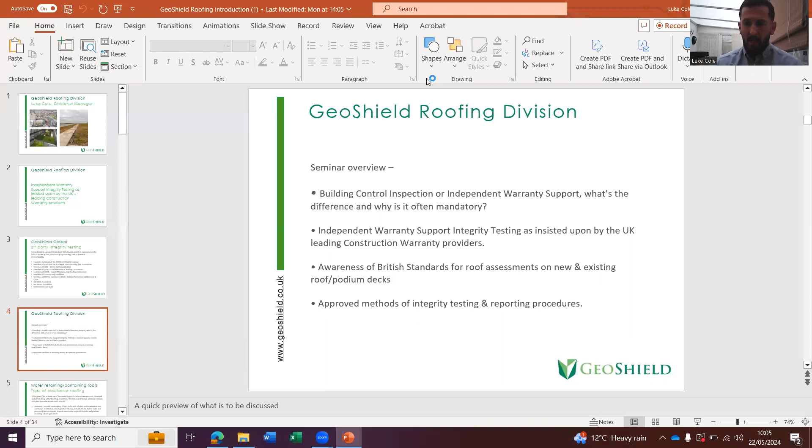So just to give you an idea of what the seminar is going to be about. So obviously we know about building control inspection. So we're going to talk about what they do, but really the difference between that and what we do as independent warranty support. So although there are some similarities, there's also some difference as well. So we'll touch on what's the difference between the two. And then we'll go on to look at some of the awareness of British standards and the requirements of companies like we just mentioned, NHBC, LABC, Premier, the big warranty providers. And then we'll touch on some of the approved methods of integrity testing and what's involved in the reporting procedures as well.

So the types of green roofs that we tend to come across, there's three types there. You've got your intensive, which you tend to see more perhaps on top of a car park, so more like a park type area, quite a deep vegetation, bigger plants, etc. Then you've got your semi-intensive, so that's something you might see like a garden roof, a much thinner type ground into that, only about 15 to 30 centimetres substrate base. And then you've finally got your extensive, again, a much thinner type base, but this one is self-seeding. So it's just the sedum that's put down and then allowed to self-vegetate. So quite a natural looking finish to that one.

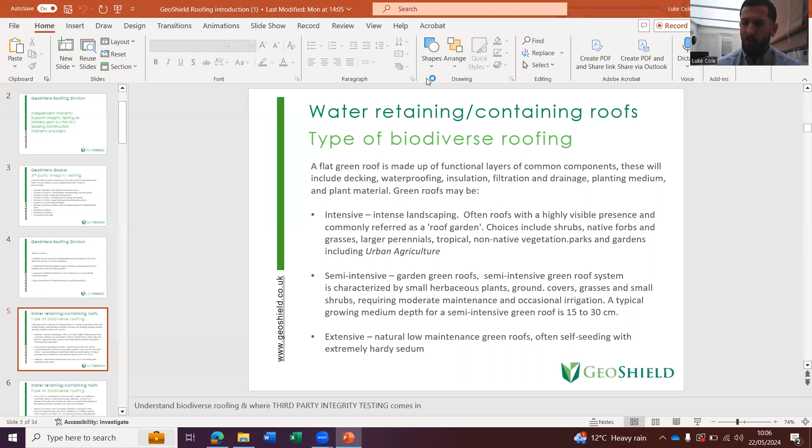Your different types of roof that we tend to get called out to test. You've got your blue roof. Some of you may not have heard of blue roofs, I don't know, but a blue roof is a bit like an attenuation tank. So it's designed to control the amount of water that goes into your storm water drains. So it acts as a tank system on the roof, and then valves are installed to let that water flow off

at a controlled rate. Your brown roof systems are more commonly referred to as biodiverse roofs. This is the self-vegetating substrates, as we said, these natural ones which are allowed to vegetate in their own way. Your blue-green, that's as it sounds. So you've got your water attenuation, and then your green roof finish, and then biosolar green roof, again, as it sounds. The idea of a green roof system, but with biosolar panels on there as well.

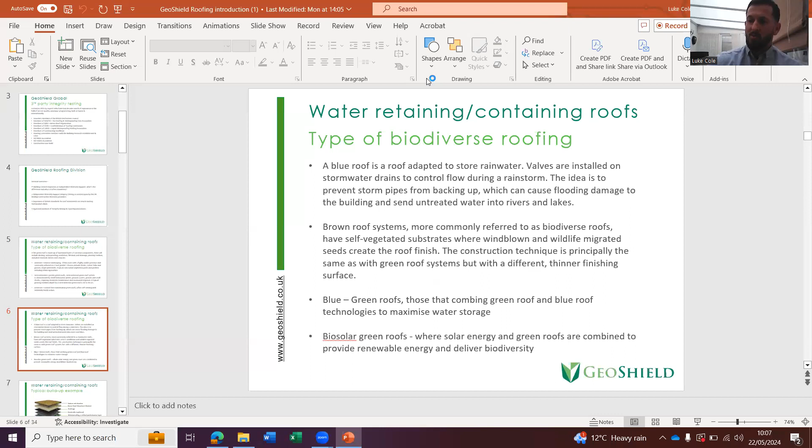So just thinking about the typical kind of build-ups of what you'd expect to see. This is quite an important slide really to pick up on, because as you can see, you've got your base roof structure substrate at the bottom there, and then your waterproofing layer sitting on top of that. Now, why I say it's important, because above that, as you can see, there's actually 4 layers of system that's installed on top of the waterproofing layer.

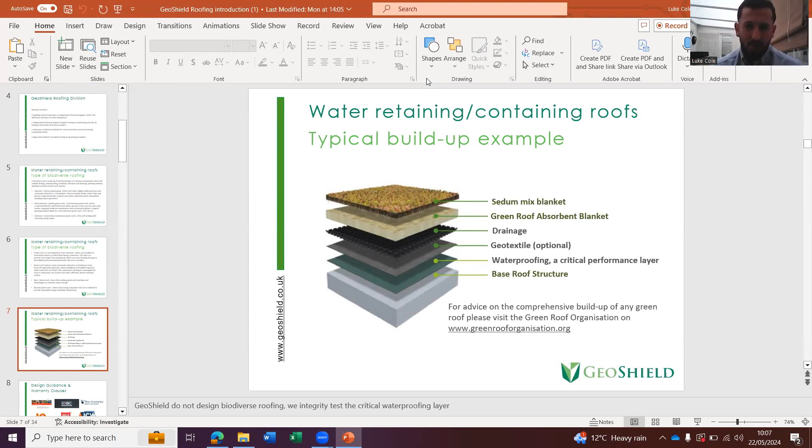And later on in one of the slides, we're going to see the importance of testing while you're at waterproofing stage. As I'm sure you're aware, once those 4 layers go on top of the waterproofing layer, to then try and find a leak is going to be very difficult. So it's the importance of testing at the right stage of your development.

So moving on to building control then, we won't spend ages on this because I know most of you are going to know what building control do. Building control are designed in a way to eliminate or to learn from past building failures. They have certain minimum standards that they need to achieve, and a building control surveyor is interested in making sure that these minimum standards are complied with. But the difference we're going to see between the two is that a building surveyor concentrates really on what they see on the day of their inspection, or perhaps at the time a completion certificate is issued.

So moving on to warranty support, so flipping the coin to the other side, very similar in a way that, again, these things all work on learning from building mistakes, or as it says here, past insurance claims. So similar in that aspect, but what's the difference? Well, we have to take into consideration not just what we see during the visit, but we have to look at the installation and the membrane across a much longer period of time. So as it mentions here, a structure within a 15-year period, for example.

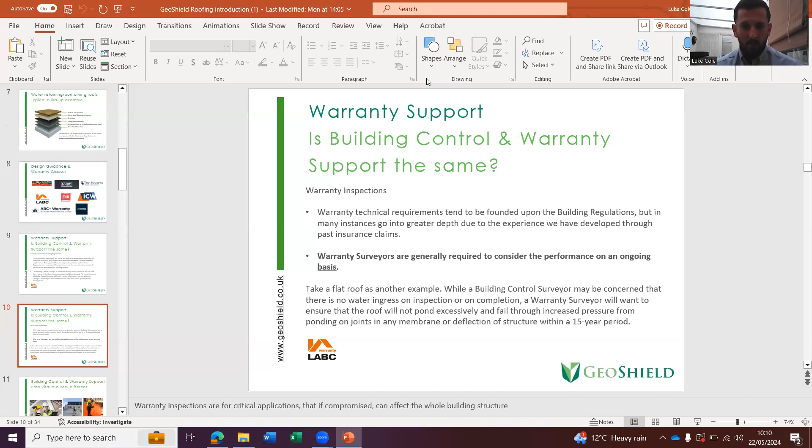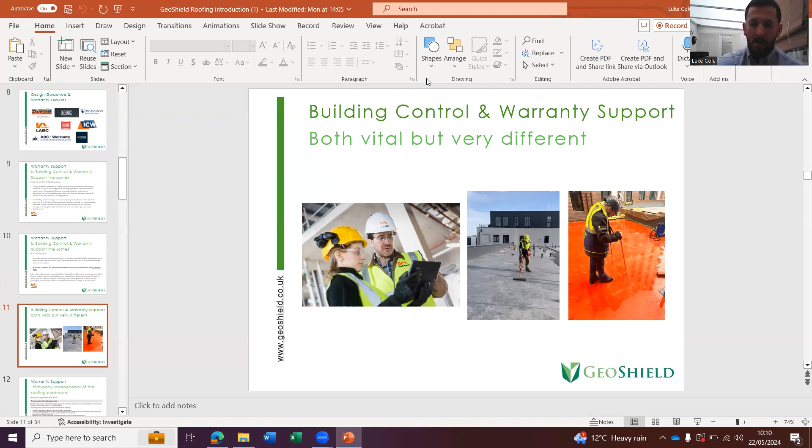So we're not looking at just what we see during our visit, but also we've got to look at the way that the system has been installed, maybe incorrect falls on the roof. They may not cause problems or issues straight away, but we have to take into consideration, will these cause issues within a few years of the building being in place. So building control and warranty support, as we know, they're both vital. There are similarities, but yet they are also very different at the same time.

So this is where people are perhaps coming unstuck, not having the knowledge of what is required. You know, years ago when I was roofing, we used to just install our product, rely on the warranty that was given by the product manufacturer, and that was good enough. But now these things are being put in place because of the issues and the claims that are coming in, that they want this third party, so this non-biased testing. So that's on flat roofs.

Similar slide, LABC again, this is the green roofs, exactly the same content. Again, required testing, suitably qualified, experienced third party who is independent from the roofing contractor. So it touches on some of the things that should be provided. So the efficacy of the method proposed in the circumstances of the project, a detailed testing regime that includes integrity testing of detailing, specifically where the warranty surveyor has raised any issues, experience and training of operator, and membership of an appropriate trade association that sets a code of conduct for the service.

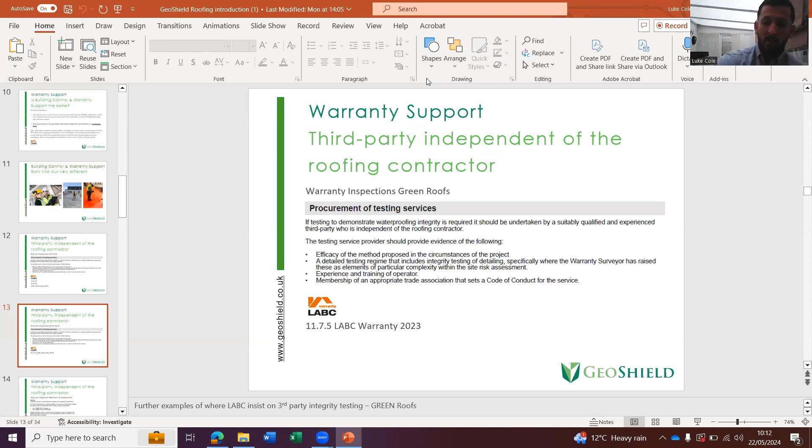So, you know, we're not preaching here, we're just literally making you aware of what is in LABC's, NHBC. We're going to go on to see some of the others, what is in their guidelines, because we're finding that a lot of people perhaps just don't realise that this is in there.

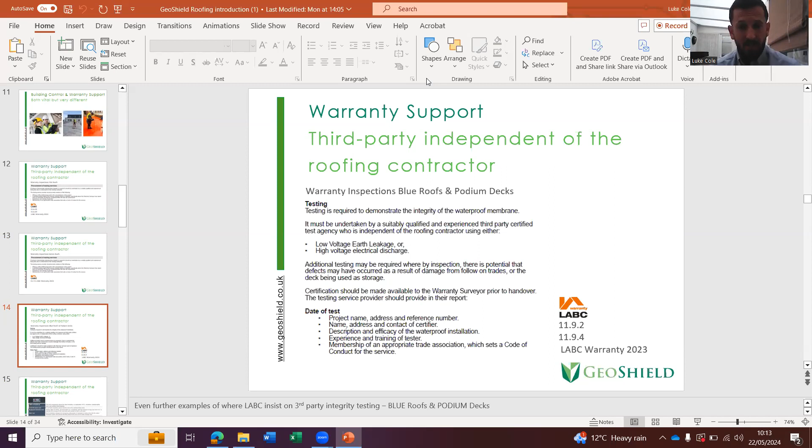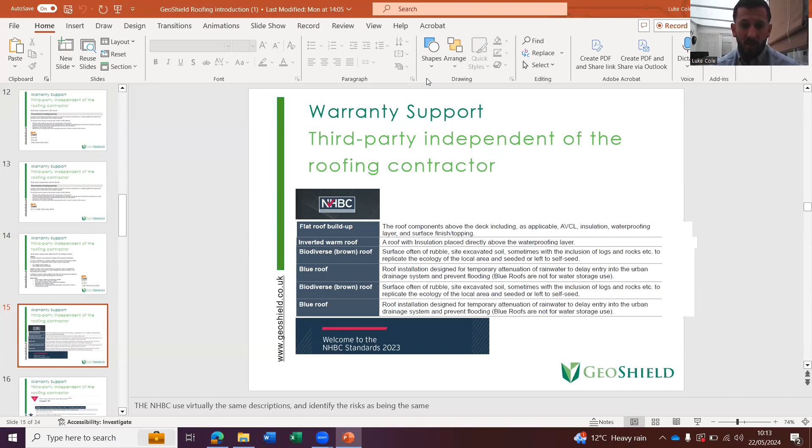So moving on to NHBC, again, another massive insurance provider. They go on to state what types of roof need this testing. So you've got your standard flat roof build-up, inverted warm roof, a biodiverse brown roof, your blue roof, your biodiverse brown roof, sort of similar, and then blue again. So that touches on the types of roof. And then we go on to see what they state in their guidelines.

It says the system should be installed in accordance with the design and the waterproofing layer manufacturer's recommendations and integrity testing prior to covering. And so just going back to that slide we looked at earlier with the green roof build-up, this is why it's important to do it prior to covering. Once your green roof is installed, you've got 4 layers sitting on top of your waterproofing, and any type of testing of your waterproofing layer is nigh on impossible at that stage without removing your layers and getting back to your waterproofing layer, which is going to be costly, time consuming, it's very difficult to do.

So it's a bit like the saying, when do you want to know there's a hole in your boat? Is it when you're sitting on the shore or when you're in the middle of the ocean? We're trying to get this testing done at the right time. So when the roofs are either finished or during the installation process.

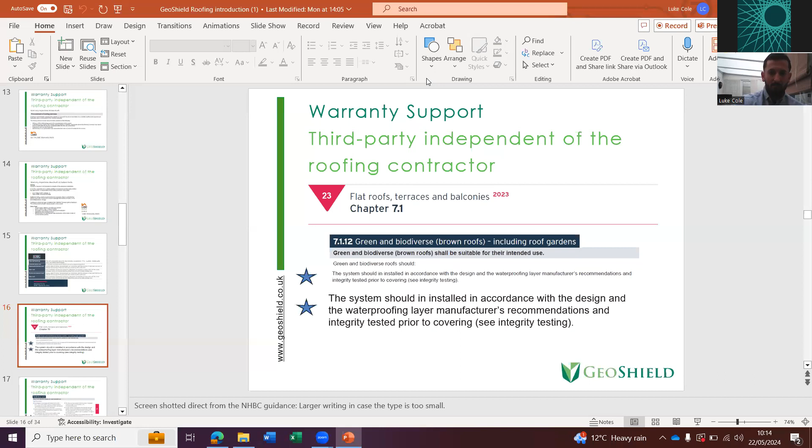So moving on, still on NHBC, it says include waterproofing layers suitable for use in the blue roof system and subject to independent third-party assessment. So for every type of roof mentioned here, so we're now looking at blue roofs, again, third-party testing is what they recommend. And again, they have the right to come out and ask to see the report at any stage.

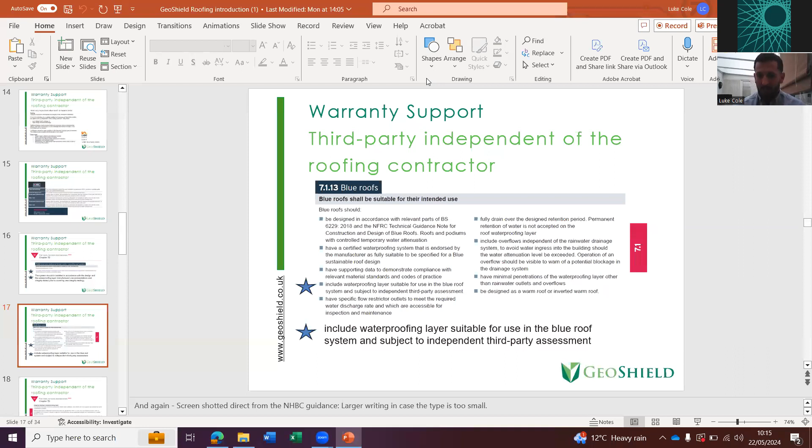So moving on to our third-party independent section, integrity testing of waterproofing layer. Just to touch on what it says, the waterproofing layer should be inspected for defects after installation. But notice it says any defects are to be repaired and retested and left in a satisfactory condition. So this again is all dependent on when this process takes place.

So if it was a big project, maybe a 20,000 square meter project, it doesn't have to be that size, but if you're following a program, you need it to be tested before it's covered. It may be that there'll be several visits booked in. So we test an area, and then once it's signed off, that area can then be covered.

But notice if any defects are found, these need to be repaired, and then the repaired areas are then retested to make sure they're in a satisfactory condition. So again, this would be included in the report, photographic evidence of the test taking place.

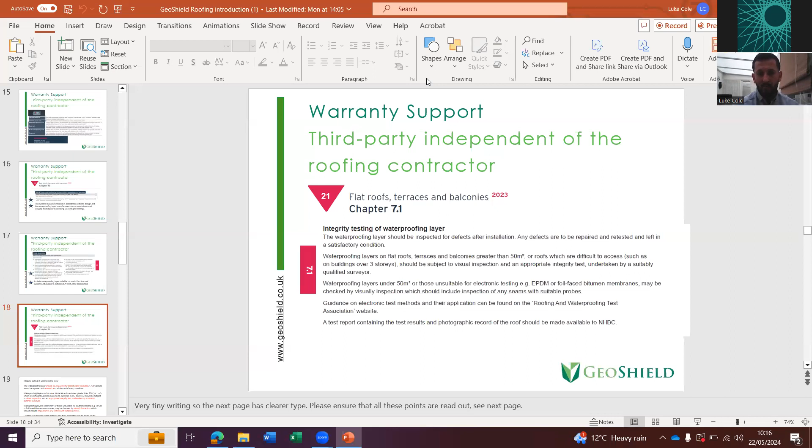So integrity testing: the waterproofing layer should be inspected for defects after installation. Any defects are to be repaired and retested to NHBC standards. Waterproofing layers on flat roofs, terraces and balconies greater than 50 metres squared, or roofs which are difficult to access, such as on buildings over 3 storeys, should be subject to a visual inspection and an appropriate integrity test undertaken by a suitably qualified surveyor.

So there are some membranes out there, as we mentioned in that paragraph, EPDM. This is a membrane which has a carbon fleck through the product, which makes it impossible to electronically test, because obviously you're running electronic current and you'll get false readings from the carbon in the product. So this is when either a visual inspection, a pick and probe, or another method of testing can be used. But again, still provide pictures and photographic evidence of this report taking place.

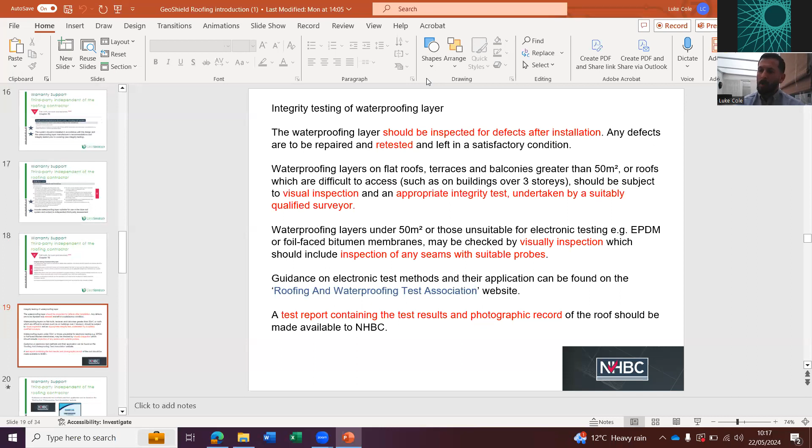So just touching on RAWTA. As we mentioned earlier, RAWTA is the Roofing and Waterproofing Test Association. This is a small group of test companies which have got together to create this company to work alongside the big insurance warranty providers. RAWTA are currently putting a clause in their membership that they want everyone to have an NVQ level 3 for testing membranes. So another qualification just to show competence of their testers.

There are different ways that people can go out and buy testers and do a day's training and go out there and say, yep, we can test roofs, but we are looking for competency. That is where the industry is going. So looking out for associations like RAWTA is a good way to make sure you're using someone who's qualified and recognised by the likes of NHBC, etc.

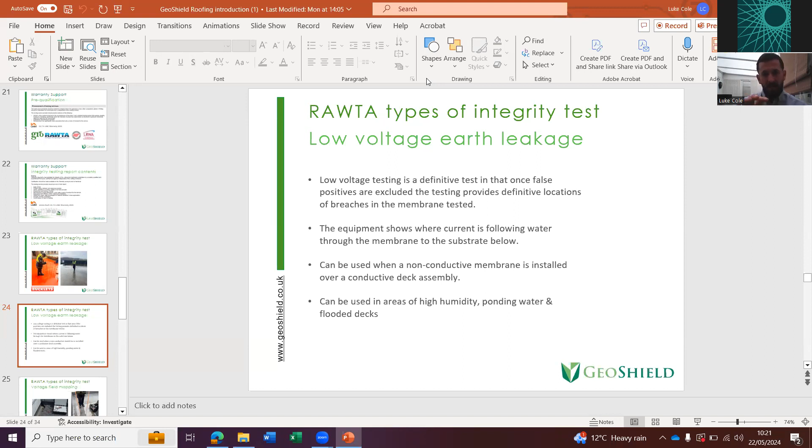You can close these in, make these wider, but once you narrow it right down to a small area, even down to a pinhole size defect can be found. So if damage has been caused by a small stone or a screw being trod into the product, this type of testing will find that. So even pinholes in liquid systems, something we come across quite often, it will pick that up. We then put a nice big yellow circle around the area, map that on our report, and an easy remediation can take place.

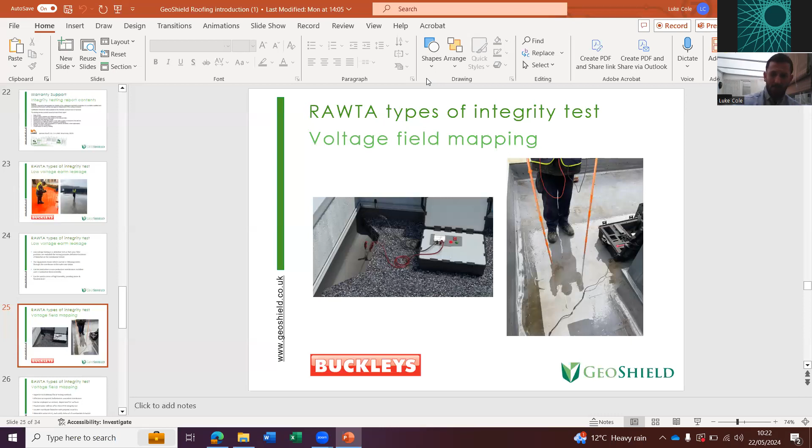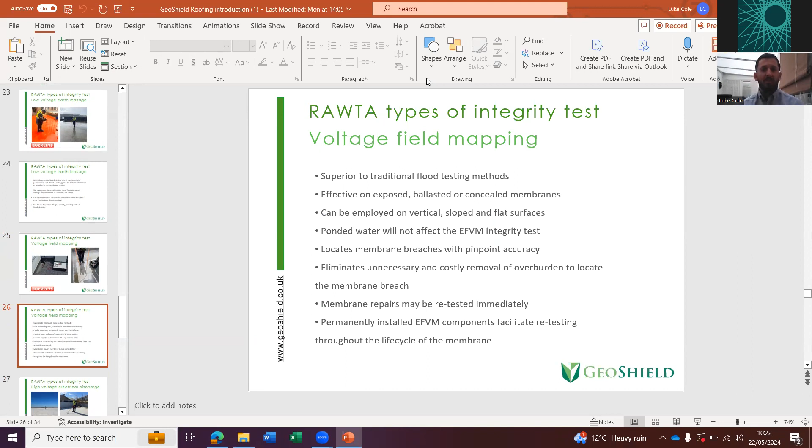Why is it superior to traditional flood testing? Well, we've touched on that, haven't we? Because you can use it on different types of membranes, and it can be used in the rain, obviously, and can be used on a fully flooded roof. But the whole point of it is it locates where the ingress breach is taking place. So it's not just to tell you whether the roof is leaking or not. It will specifically pinpoint the areas that the ingress is occurring.

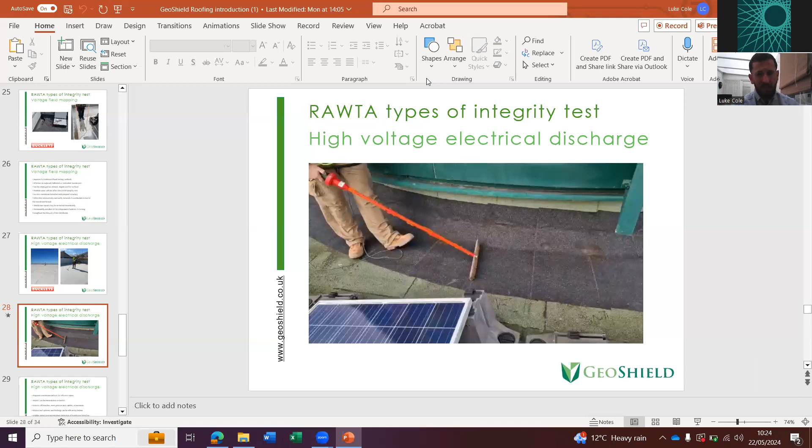So again, the advantages of this type of testing over perhaps different methods: pinpoints membrane defects for efficient repair. Repairs can be immediately retested, but again, this is based on what product is being installed. Detects all breaches, even pinhole capillary action leaks. It can be used on slope roof systems and flashings, and enables direct, non-interpretive detection of membrane breaches. Very good method. A basic technology, really, when you think about what it's trying to achieve.

When people ask me to explain how it works, it's a bit like when you're 10 years old and you're in your science lab and your two wires don't quite meet up and they stick a bit of tin foil between the two wires to make the circuit. You're doing exactly the same thing on the roof. You're just using water to make the circuit up, to complete that circuit and let you know where the defects are.

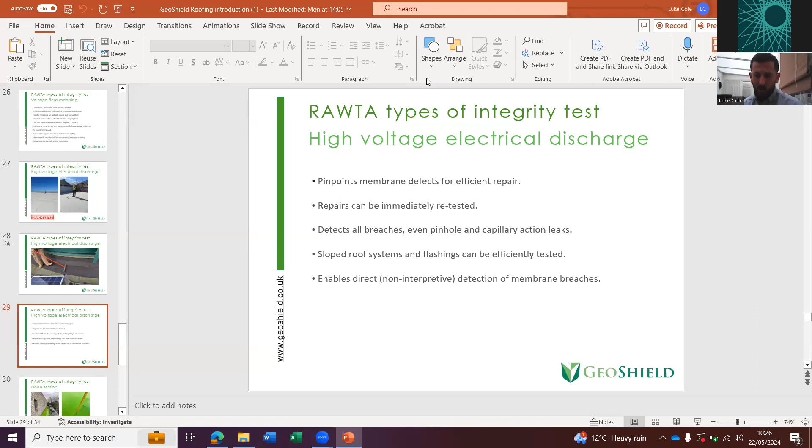So traditional types of testing, flood testing here, on this occasion with some dye poured into it. Again, there is a place for this type of testing. We're not saying it's not a feasible type of testing to use, but it doesn't pinpoint the exact location of leaks. So there are probably better methods out there that can give you an exact location rather than just an area of where the water is coming from.

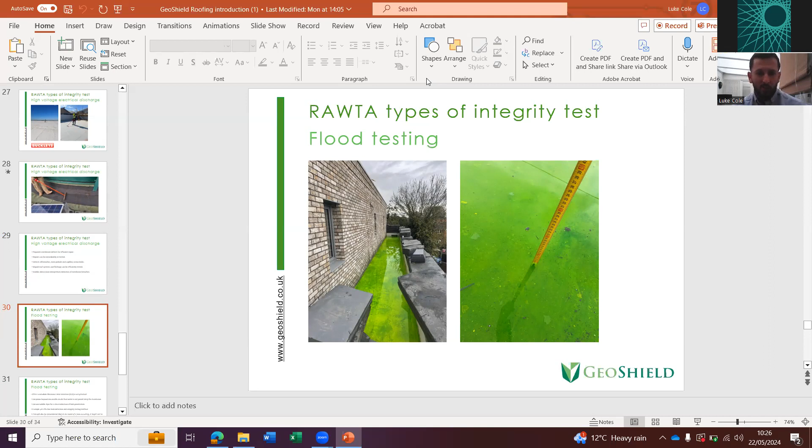So when is flood testing used? Often used when electric testing is not practical. So maybe, for example, on EPDM, like we mentioned earlier, ELD, depending on what the substrate is, sometimes it's not practical to use as well. Normally, a concrete substrate is perfect, or if you've got a conductive VCL layer, which is great as well, or a silver foil insulation, again, perfect conductor.

There are ways to still use ELD depending on what the substrate condition is and what your roof build-up is. So you can prove beyond reasonable doubt that water is not penetrating the membrane. So if you fill up a roof and nothing comes through, you can tick that area off as not the cause. You can use soluble dyes. So again, it gives you an indication of where the leak is coming from, different areas, different color dyes. Simple yet effective leak detection and integrity testing method.

But as I mentioned, we prefer to use the electronic test for independent testing, because it is more comprehensive and gives you a better idea of how well the membrane's been installed and where the defects are.

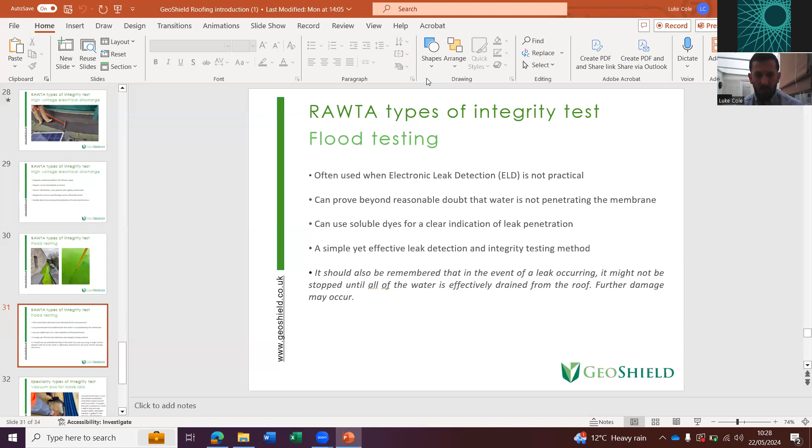We've also got our vacuum box. I don't know if any of you've come across this before. So it's a vacuum sealed box. You can use this at high or low pressure. You can also fill it with a soluble detergent solution. So a bit like when you've got a puncture in your inner tube on your bike and you dip it in some water and see where the air comes out.

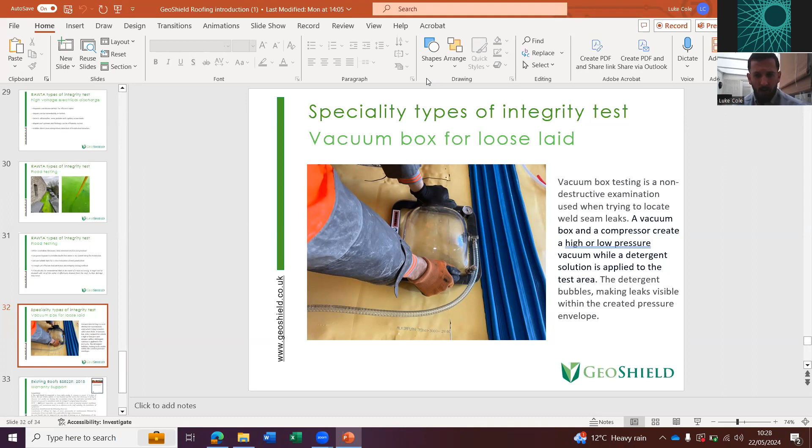By adding this vacuum type box with a detergent, you can see if there's any air escaping, and it will let you know there's a defect in the weld. It can also be used dry to see how strong your welds are on your systems as well. We don't use it all the time, but it is effective in some cases, depending on what you're trying to detect.

So just to touch on the British standards then. So we're looking now, rather than new roofs, at existing roofs. So what do the British standards recommend? Well, they recommend that a flat roof should be inspected at least twice a year. This is due to autumn time with the leaves and dirt and debris and the outlets being blocked, etc., and checking that drainage and things like that are getting away nicely. And then additional inspections are also advised if needed during these times as well.

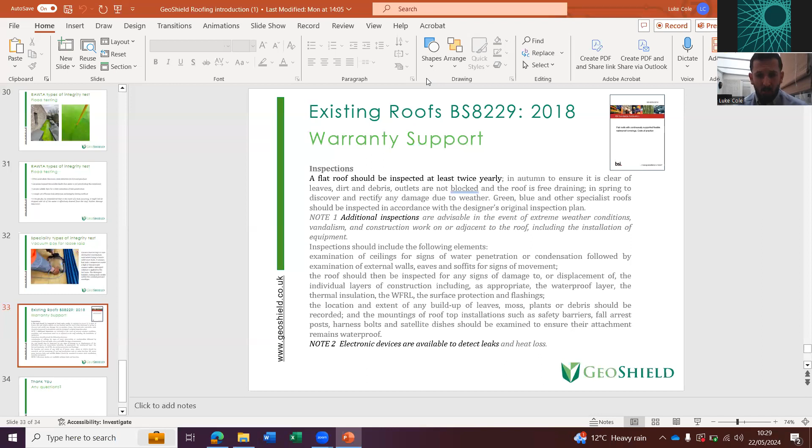And as it says, electronic devices are available to detect leaks. So it's a good thing, again, like we said earlier, that thought of being proactive rather than reactive. It's something we're certainly heading towards in the industry, aren't we? Not to wait till we've got a leak. Our roofs are our first defence, aren't they, to our building? So it's important to make sure that we're keeping up with these inspections.

So that's basically what we're talking about this morning. So the thought of independent inspections on new builds, and then the thought of keeping up with inspections on our existing roofs as well. So if there's any questions about anything, feel free to ask.

I don't know if Shanika can help me. I can't see everything.

So we have one question at the moment from CM. What stage do you come out to site visit on the testing? So that all depends on how big the project is, and when the client really wants us to come out. So what you've got to think about is, if you've not got other trades working on there and you're going to finish your project and you want it inspected at the end and handed over at that point, then that would be the best time. If you inspect too early and you've got other trades coming on that potentially could damage your roof,

there's two ways of looking at it. One way is to get us in early, get the inspection done, and you've got proof that the roof is in good condition. And then if any other trades cause damage, you can then say, well, we had it inspected on this date and it was fine. We're now going to have to get it re-inspected and they've damaged it. So you can use the two reports to compare the condition it was in to what it's in now.